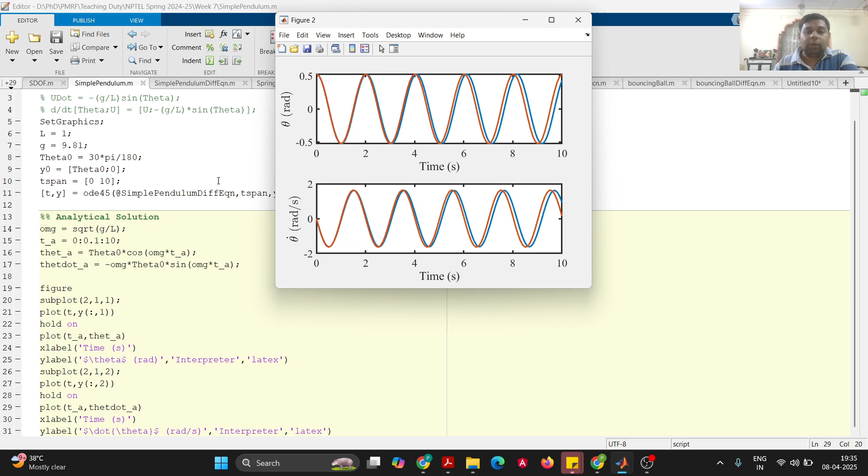And if we now rerun this, we can see that the blue curve is the numerical solution, and the red one is the analytical solution. So what you can observe here is the analytical solution is accurate for up to, let us say, the first

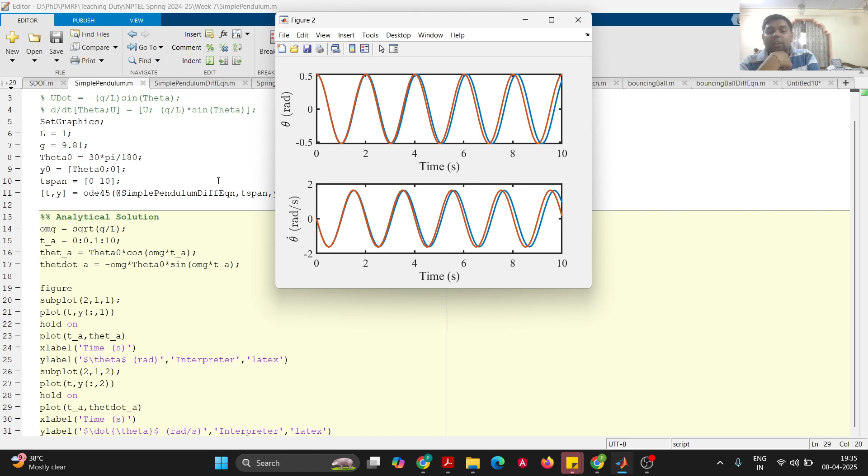3-4 seconds or so, but later on it seems to be deviating, because in the analytical solution the time period for each oscillation is the same, but as per the numerical solution the time period seems to increase as we increase the time. Now if we want to see how the solution behaves over a larger time interval, let us change the time span to 30 seconds and try to rerun.

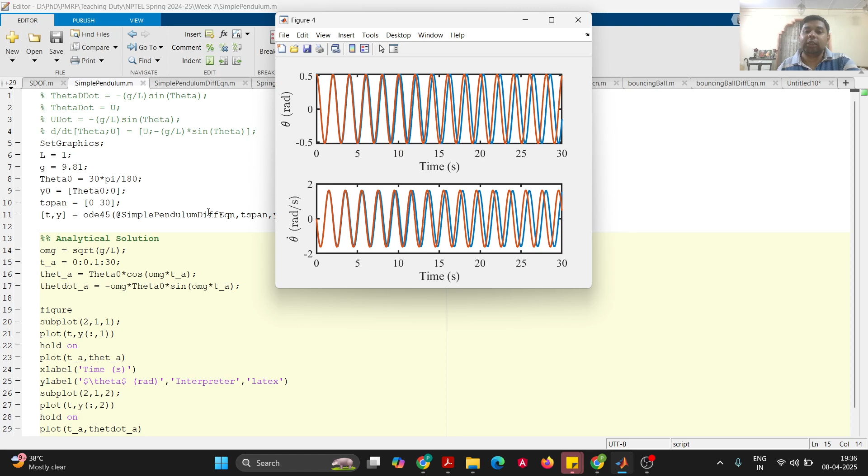So then you can see that the deviation actually increases even further. Yes. Yeah, so you can observe that, right? So this was actually for an initial angle of 30 degrees, which is not that big an angle as such, but still we can see that there is a considerable amount of deviation from the analytical solution. Now let us change the initial angle to 10 degrees.

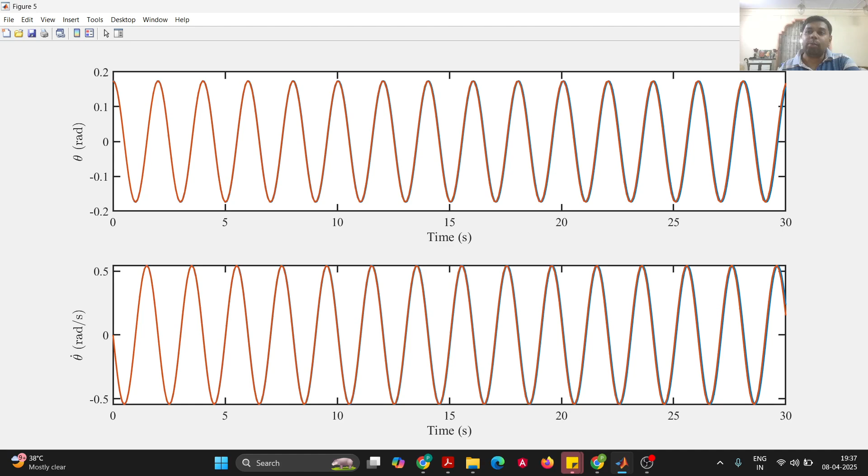So let us change theta naught to 10 degrees and let us try to rerun. So now you can see that the analytical solution is very close, right? So in other problems where you can explore this approach, wherever you know the analytical solution or approximated analytical solution, you can compare it with the numerical solution in this way. So this was a demo example where we consider the simple pendulum as the system.

So was that interesting? Something different for you? Yes, sir. Yeah, so I understood. Yes, yeah.

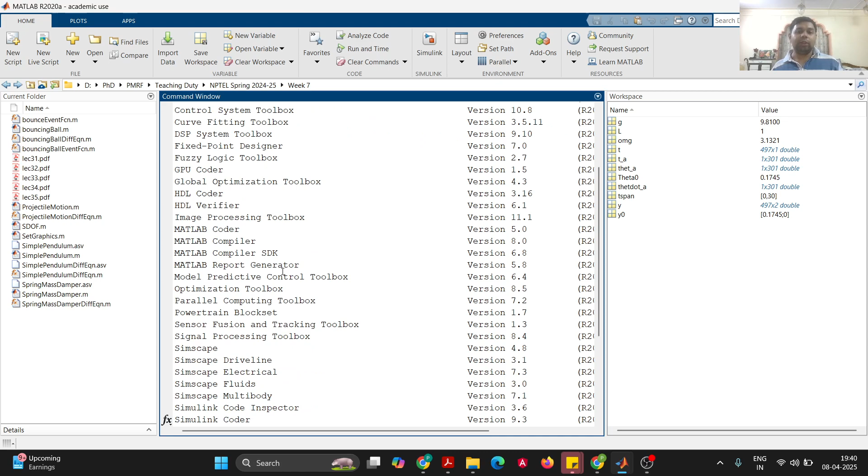toolboxes. So depending on what you have installed, when you install MATLAB, you get the options of installing different toolboxes. So depending on whatever you have selected while installing, you will see the different toolboxes that you have. To check which toolboxes you have already, you can type in the command window ver. That will show you the MATLAB version and also the toolboxes that you have installed, their versions, and all these details.

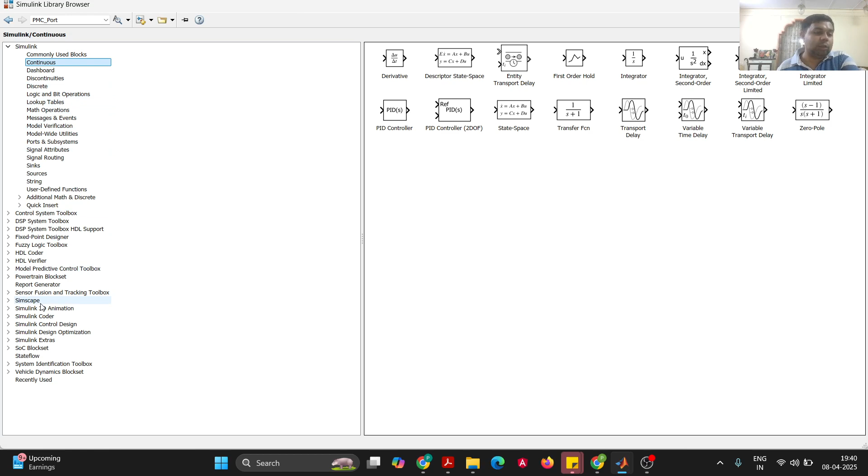So moving on to our basic model. In Simulink you will see different blocks which you can explore for different applications, like the basic Simulink blocks for continuous and discrete systems, etc. And again, the application specific toolboxes over here, you can see from the library browser. Now here we want to create a model of the simple pendulum. So let us first try to solve the linearized differential equation theta double dot is minus g by l theta, or we can also try to solve the non-linear version from here.

So now in Simulink, what we will be doing is integrating. So let me pause this screen sharing for the moment and go to the whiteboard again. So now what we will do here is create a block diagram to represent this differential equation. So let us say we have this signal which is theta double dot. To solve this, we need to integrate it twice, right? Is that correct? Yes, yes.

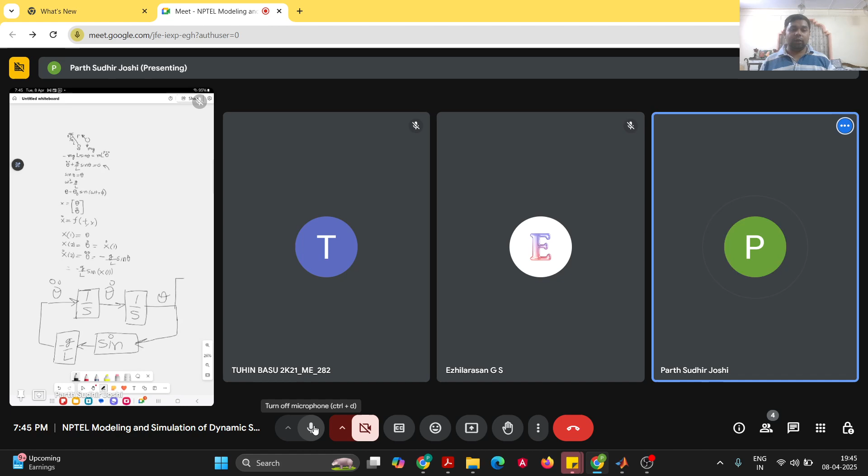So in this case, for this system, we give the initial conditions. So let us say we displace the pendulum by some angle and leave it. So it is in the form of potential energy, and once we leave it, the energy exchange continues from potential to kinetic, etc. So it's free vibrations, right? So then there is no source here. It's in the form of initial conditions that we provide. So that gives us the starting point to solve the differential equation.

So in the integrator, we will provide the initial conditions for each integration. And yeah, so does that answer your question? Yes, I can understand. Right. So let us now move to Simulink.

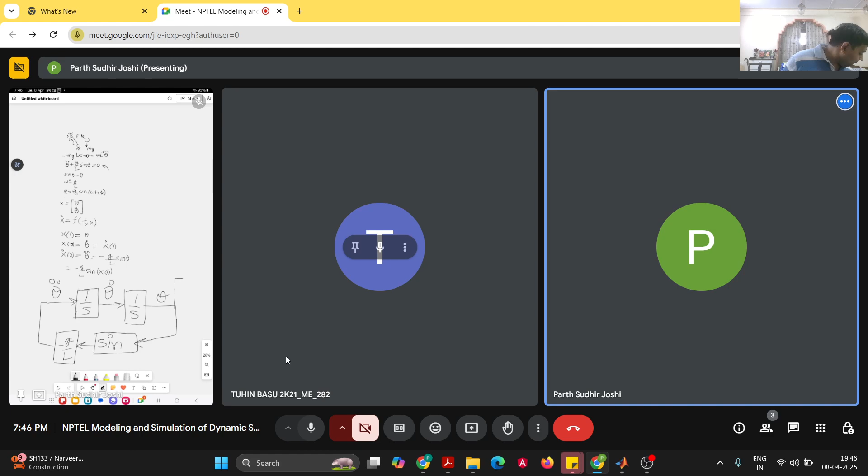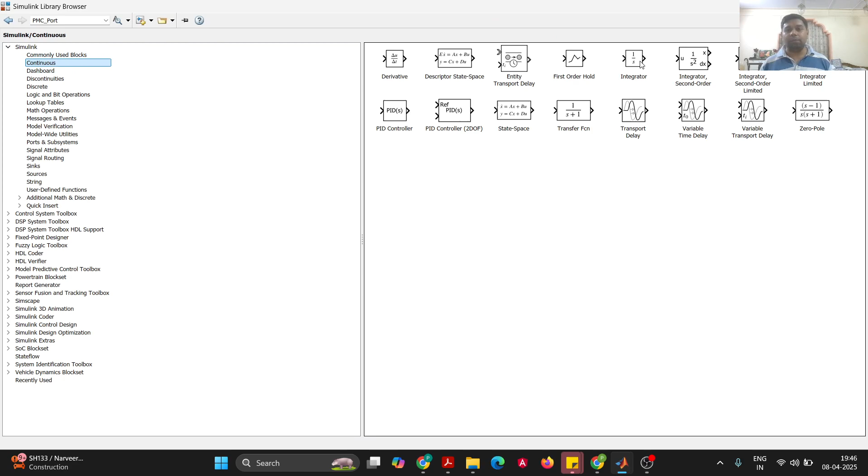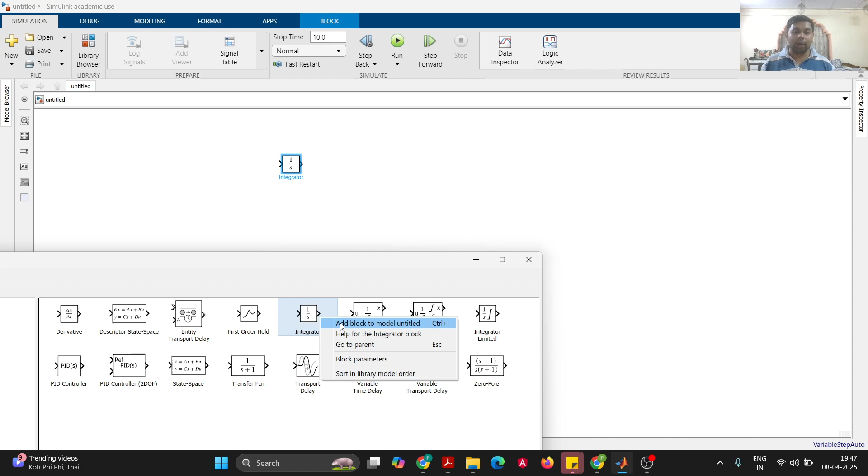So now let us go to our library browser, and put this integrator block into our Simulink model. So to add this block to the Simulink model, there are various ways. Either you can just drag and drop, or you can right click on the Simulink block here, add block to model, whatever the name is. So it's untitled here, and you can use the mouse to drag it and position it anywhere.

Right. So now let us save our model and name it as simple pendulum. Now to connect these two blocks, we can just use the left mouse button to drag a connection and place it into the input.

So let us consider that the input to this integrator is theta double dot, so the output of this is theta dot. So our initial condition of theta dot is 0, and our initial condition for theta is theta naught. So either we can provide the initial condition as some numerical value over here, or if we provide the variable name over here, it can actually pick up that variable from the workspace.

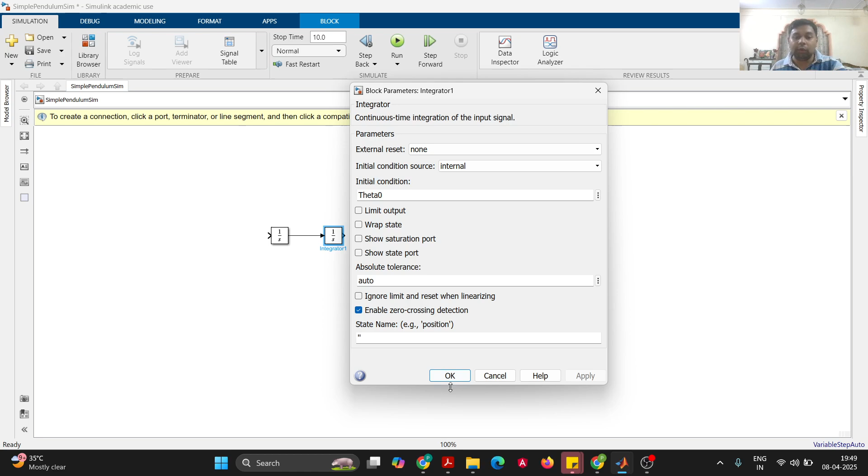So here the initial condition is theta naught. So this is how we can give the initial condition to the integrator. When we double click on it, this contains the parameters. We will be using all the default things, just put the initial condition here. Now the next part is creating sine theta.

So here we will go to the math operations tab in the Simulink library browser, and we will use the common functions kind of block. So here you have a trigonometric function block. You can add this block by right clicking. So this will add the sine. Since we want sine, we can just directly use the sine function. It also has other functions which we can use, so you can explore that.

So now we will basically perform the sine operation on this. So this will give us sine theta, and then we need to multiply it by g by l. To multiply it by g by l, we have two options. We can simply add a gain. So you can use the gain block, and by double clicking on this, you can provide the gain as minus g by l. Since we have already defined these variables in the base workspace, it will be able to pick up these values from there.

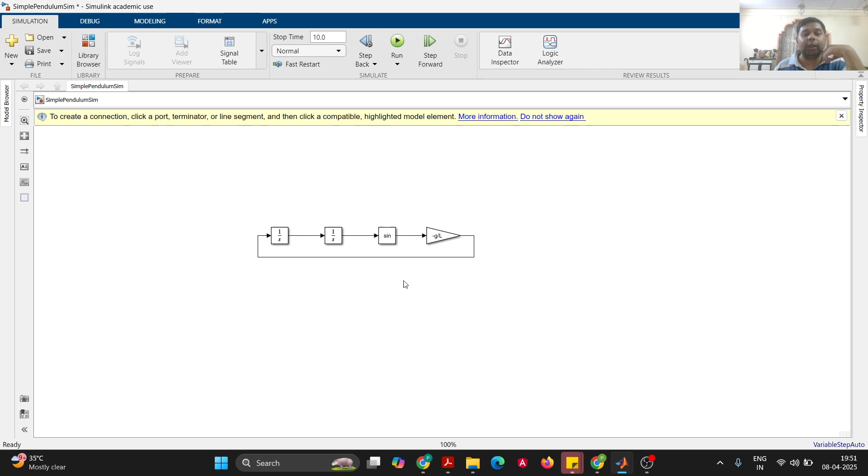So if we do not have these variables defined in the workspace, we need to create a MATLAB script which initializes these parameters, like L, g, theta naught, and all those things. And so that's it. So we have defined what is theta double dot. Now we just need to connect it to this integrator, and we are done.

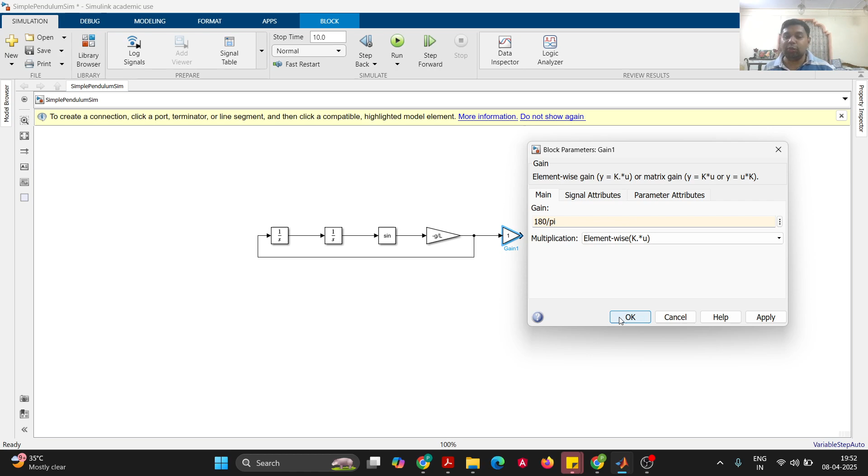So now this will give us the theta value, and it will be in radians. If we want to convert it into degrees for visualizing the output, we can convert this from radians to degrees by multiplying by 180 by pi. In MATLAB you can use the word pi; it has the inbuilt value of pi. So 180 by pi will convert it into degrees, and then we can use a scope.

There is another way in MATLAB, especially the newer versions, to add a block to Simulink. You can just double click anywhere on the screen and type. You will see a magnifying glass appearing, and if you type the name of the block that you want, it will show the list of blocks which match that description. So I want to use, let us say, a scope.

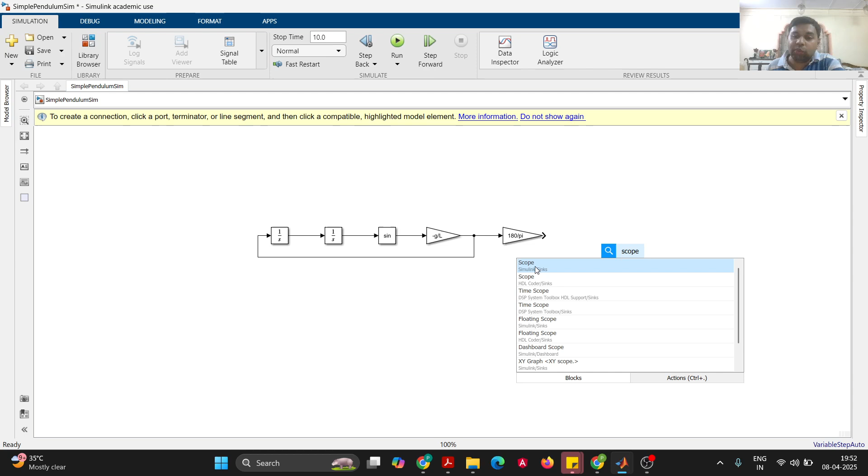So this is the way you can insert a scope directly if you know the name, or otherwise you can navigate the usual way: go to the Sinks tab, and you have different sink options. You can use a scope, and if you want to log this variable to the workspace, you can use this simout block, To Workspace.

So what you need to do is create a branch and provide this as an input to this block. And here you need to provide the variable name by which it will be logged to the workspace. So let us say we give this variable name, and we can save it either as an array, a structure with time, or a time series. For the time being we can save it as a time series.

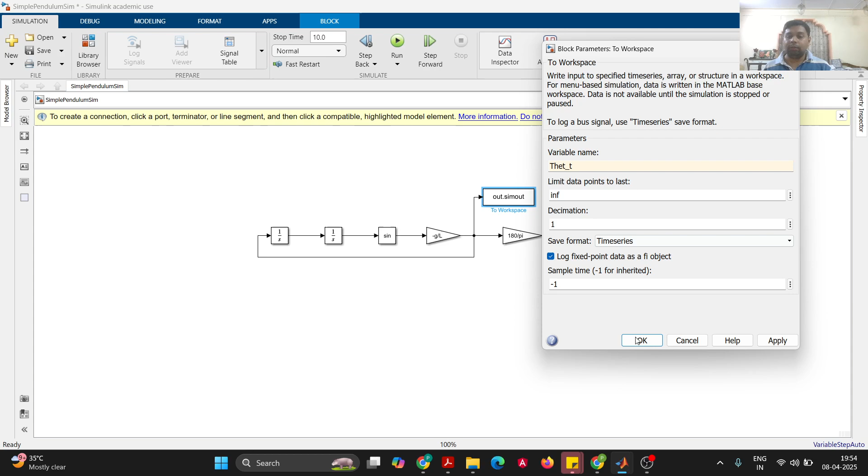Time series means that it will create a structure which contains the time values for the simulation as well as the values of that variable. So it will store the time along with the variable value. So let us say OK. And if we also want to store the value of theta dot, we can add another instance of this block.

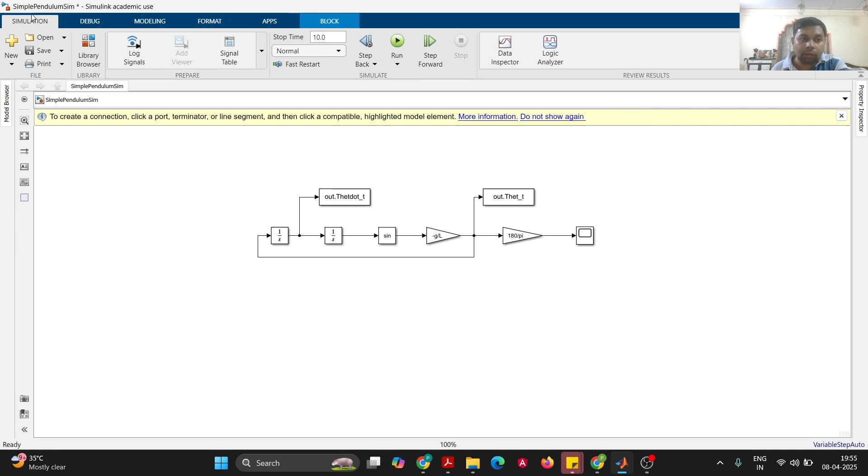After the first integration, we will get theta dot. So here we have to pick up this signal and let us call it theta_dot_t, and also store this as a time series. When we run the Simulink model, it will run over a certain time interval starting from 0, and here we can provide the stop time.

By default it is 10 seconds, and we can simulate it for, let us say, 30 seconds. And if you want to store the simulation time values separately, go to the Sources blocks and you will see a Clock block. You can add this block, and it will output the current simulation time.

And this has the option of decimation. Decimation means that it will store the values every 10 time steps if the decimation is 10. So if our time step is every 1 second, it will start at 0, then after 10 steps it will store at time t equals 10 seconds, and so on. If we pick decimation as 1, it will provide the output at every time step.

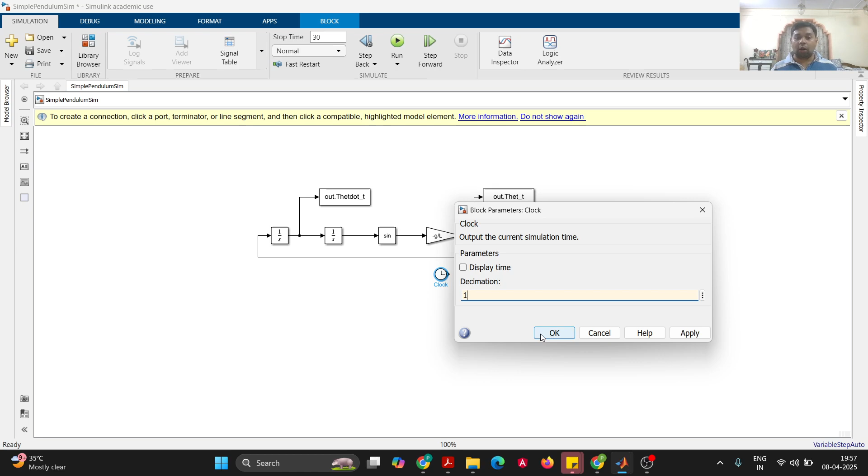And if you want to store this simulation time to another workspace variable, you can go again to Sinks and add a block.

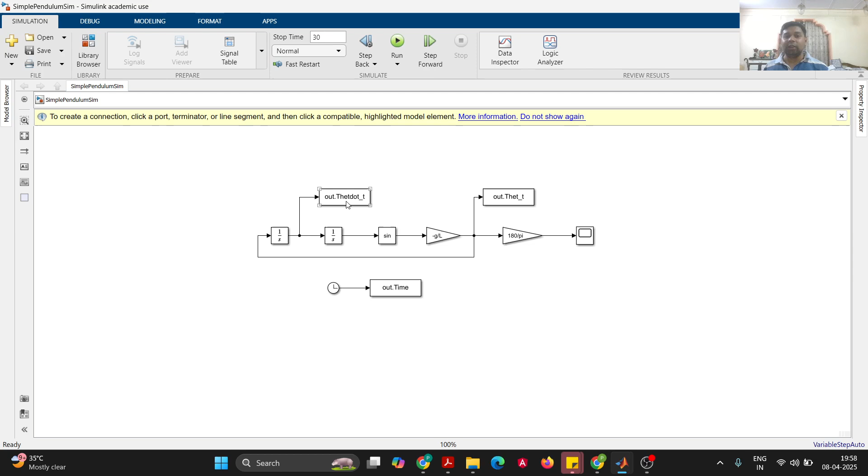And let us name it as time. Now if we are already storing time, then we might as well store it as an array, since time series contains the simulation time. So if we are storing a time variable separately, then we can also convert this into an array form, or we can also stick to time series. So depending on our memory availability and those constraints, you can decide whether you want to store it as a time series or the array format.

So is that clear? Any questions? Yes, right?

Okay. So now we are ready to run the model. To run the model, here you can see something called variable step auto. If you click on that, you will see that the solver name is variable step auto. If you click on this gear symbol, then you will go to the solver settings.

So here you can actually select what type of solver you want. The default one is variable step, and we allow MATLAB to automatically choose the solver; it will analyze what kind of system we have modeled and choose the solver accordingly. If you expand this, you can see the solver details like maximum step size and minimum step size, etc.

To understand the meaning of all these things, you can read the documentation. I will not be doing a deep dive into all these things, but to start with, we use the default options and see what is the output. So let us go to the run button and try to run the model. It will first compile the model, and if there is no error, it will run the model, and we can see the output in the scope.

So we can see here the output in the scope. It actually doesn't seem to be that good. You can see that the output doesn't seem to be realistic. It's a continuous system, and this is jagged, it's not a smooth curve.

So now let us go to our solver settings again. If you hover over this right corner, you will see auto. It has selected the solver named ODE45, and it has selected the maximum step size as 0.6, right? So what this algorithm generally does is that it starts with a coarse solution, and then it tries to refine it depending on what the gradient is.

If the gradient increases, then it will use a smaller time step, so it can adaptively change the time step. Here you can choose adaptive or non-adaptive, based on your requirements. It's a simple problem, so we can probably go with non-adaptive for now. Our earlier max step size was 0.6. So now let us try reducing the max step size and see whether it refines our solution.

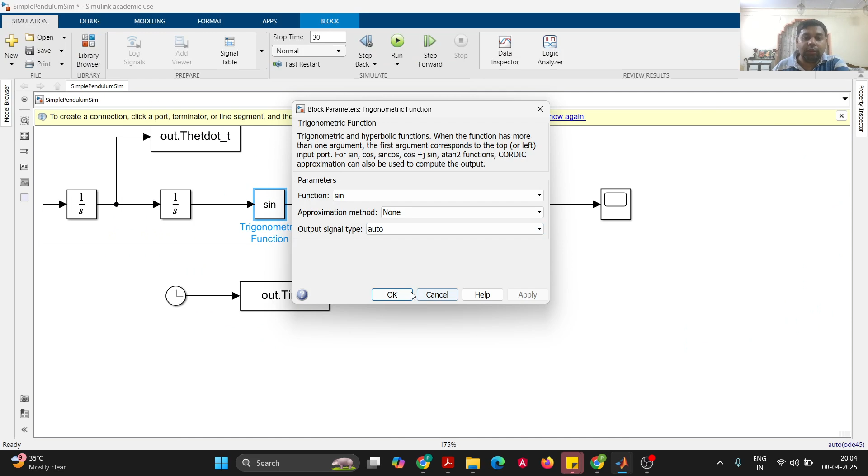So now if we want to go to the documentation for any block, you can double click on the block and say help, and it will open the documentation for that particular block. It will give us the details of this particular block. So here we are considering the angle in radians, and by multiplying it by 180 by pi, we convert it into degrees.

So that's the way we can use Simulink here to solve this problem. So any questions? No, it's clear. Okay.

So similarly, let us move to another problem. We know our usual spring mass damper system, and we are already familiar with the differential equation for that kind of system. So now let us return to our whiteboard.

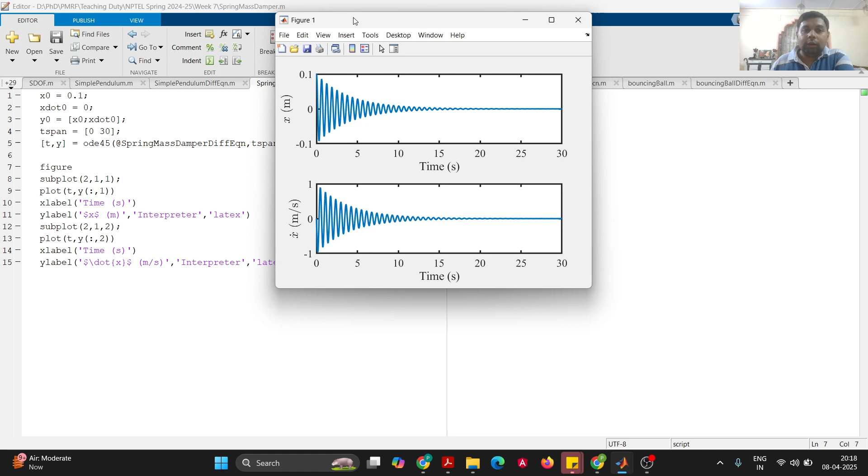So if we change the damping value here, let us say C was selected as 0.5, let us change it to 1 and rerun the script again. If you compare, the oscillations are dying out in a lesser amount of time, right? So the damping has increased, and it will reduce the time required for the oscillations to die out.

Just by looking at the graphs, can we tell whether it's underdamped, critical or over? Yes, the qualitative nature of the graph itself will be very different for overdamped or critically damped. Now, to make out whether it is critically damped or overdamped may not be that easy. For that, you have to look at the specific damping constant value. But for overdamped or critically damped systems, there will be no oscillations at all.

So let us try to increase the damping values. Now we tried 1, now let us try 5. So now you see that there are hardly any oscillations. So now let us reduce the time span; it's much clearer now, or even 5 seconds would be enough probably.

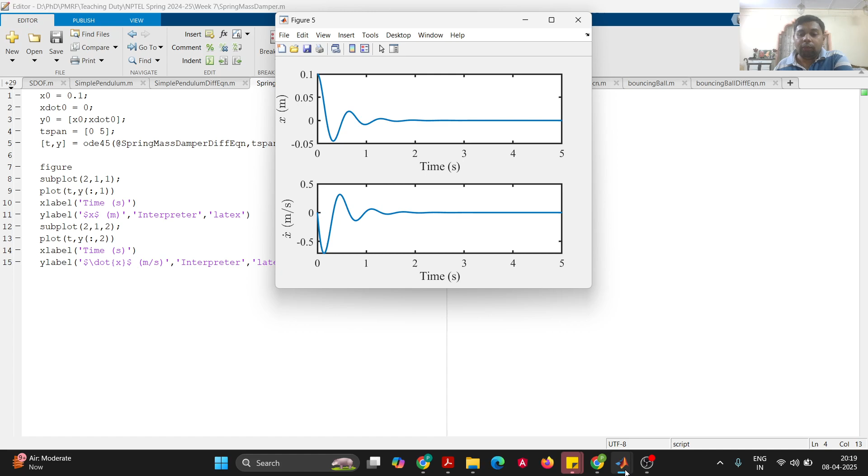So this is for the damping value of 5. If we again increase the damping value to, let us say, 10, and run it again, you can see that the number of cycles it goes through keeps decreasing. There is hardly one cycle of oscillation and it settles down to almost zero.

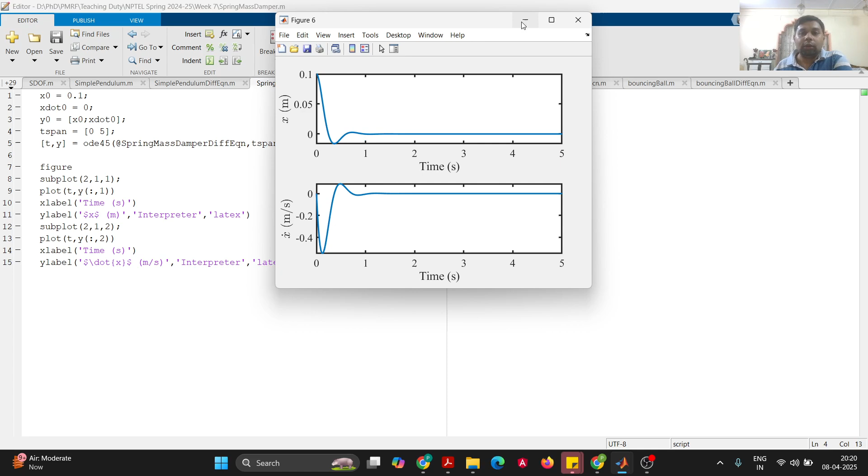Now if we select the value of 20, so if C is equal to 20, that is called critically damped. So why 20 here? Because it is the value where C square is equal to 4 into m into k, which is 4 into 1 into 100, which is 400. When C square is 400, C is equal to 20. So that is the critical damping value. Now let us try to run with that.

So now if you observe, there is actually no oscillation and it just directly goes to 0. If you want to zoom into the plot further, you can pick the time scale and use the magnifying glass tool to look at the plots more closely. But you can see that there is no oscillation, so it is called critically damped.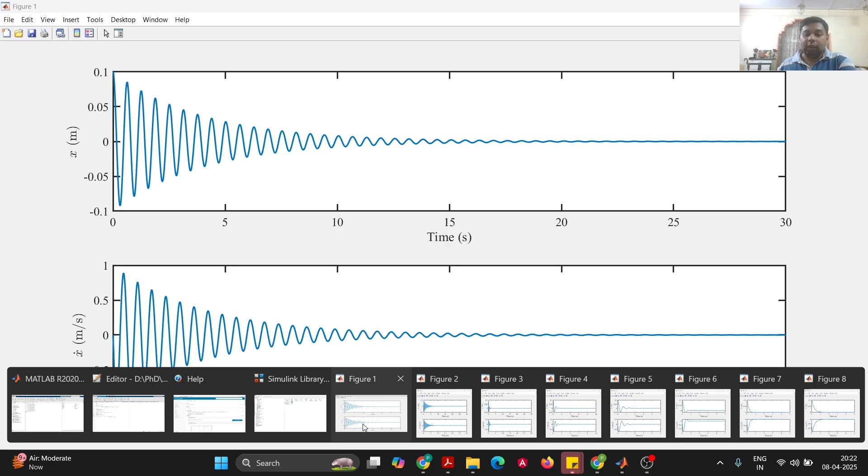And even in this case, even in the underdamped cases, it will eventually settle down to 0, but it will take longer. So as we go on increasing the damping value, it will take less time to settle down to 0.

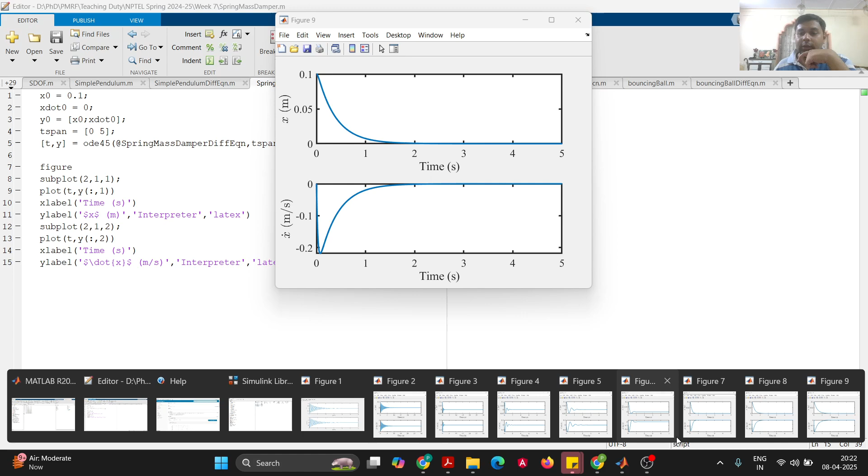Now let us try another example; let us try to increase the damping even further. So you will see that the time required for it to settle down to the steady state values again slightly increased. So you can see that the critical damping case is the one in which it takes the least amount of time to settle down to its steady state value.

So when we design systems where we want to avoid, let us say in case of robotic manipulators, etc., where let us say you want to move the arm in a factory or anything like that. So if you visualize a robot which picks up things and places it somewhere, there we would like to avoid the oscillations as much as possible.

Or even in case of simple examples, you might have come across doors which have a piston cylinder kind of arrangement for automatically closing. So once you open the door and leave it, it will automatically close the door, right? So it has a mechanism along with a piston cylinder arrangement, which is essentially a damper. So there, if you leave the door, it never goes through any oscillations, right? You must have observed.

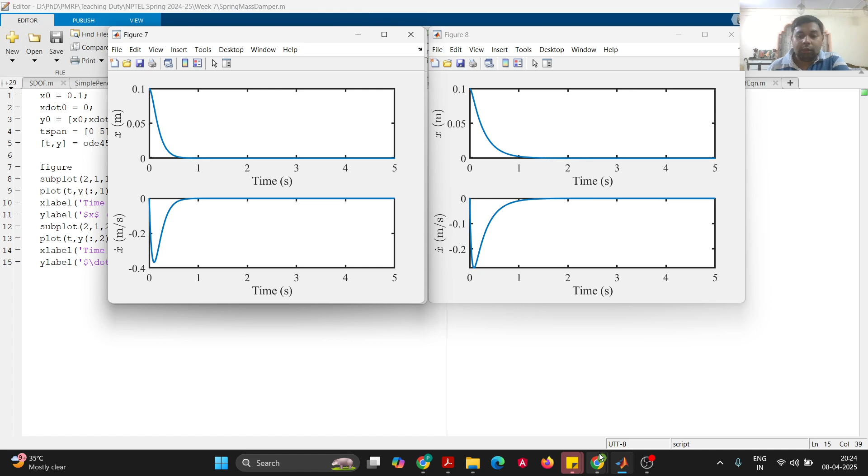So those are examples of critically damped or overdamped kind of systems where the damping is so much that there are no oscillations and it will just gradually go very smoothly to the steady state position of zero. So make sense? Yes. Yeah.

So this is how you can use a MATLAB script to simulate this behavior. Now we can again try to solve this same example using Simulink. So for that, let us create a new model. Sorry.

So now let us again go back to our whiteboard. So we had this differential equation. Now what we want to do is, we have x double dot as our signal. So then our x double dot has to be integrated twice to get the displacement x.

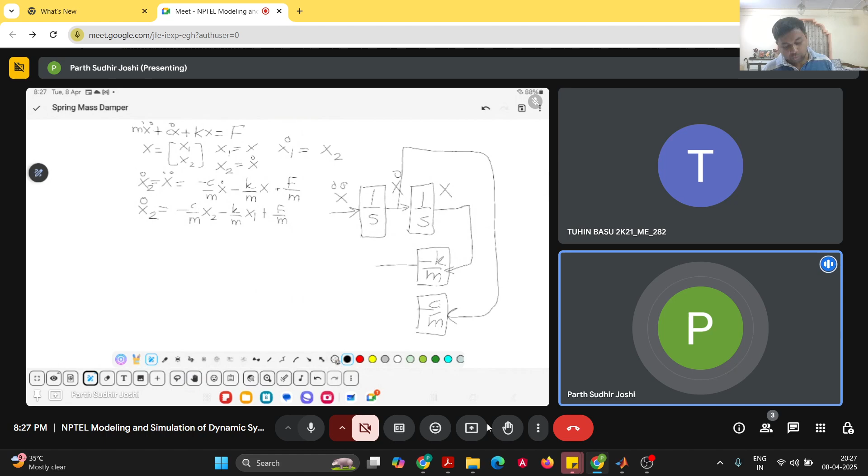So one integration will give x dot, and another integration will give x. Now what we know from our differential equation is that we have to multiply this by minus k by m into x, and then we also need to add minus c by m x dot. So we need to take the signal, minus c by m into x dot.

And if we have any external force, we also need to add that. So that in this case would be a source. So we will basically add these three things together: minus k by m x1, minus c by m x2, and f by m. So this will be added together, and this will give our x double dot. So this will be our block diagram in this case. So does that make sense?

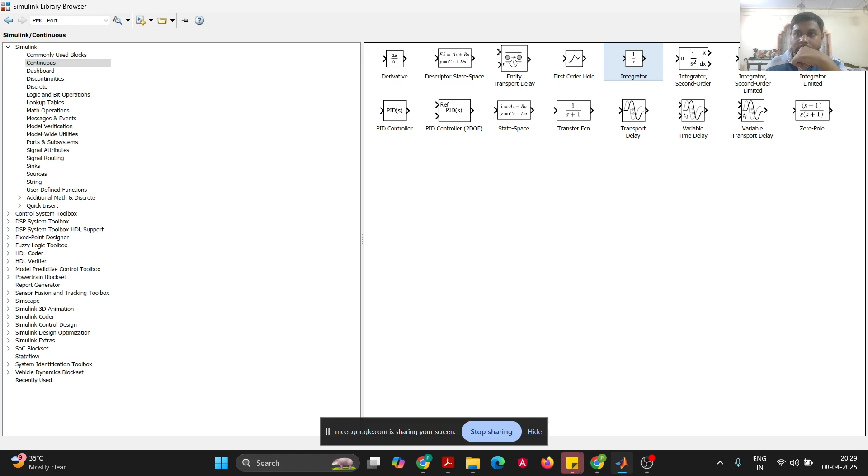Yes. Yeah. So this is how we can create the block diagram in Simulink. So let us try to do that in Simulink now. So these will be our two integrators. Then

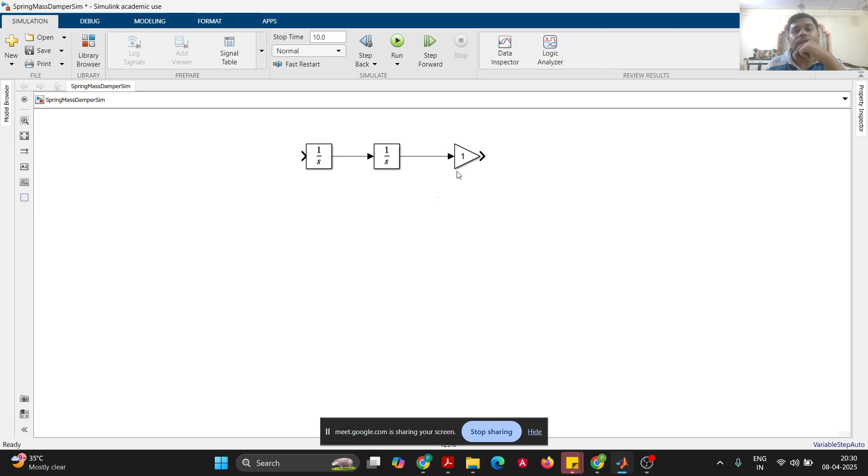So now here I have given the gain value as minus k by m, but now you can see that Simulink highlights it in red, and it shows the error as unrecognized functions or variables. So we have not defined these variables in the workspace here. So we will have to create a MATLAB script to define these variables. So we'll define it later. Let us first finish creating the blocks.

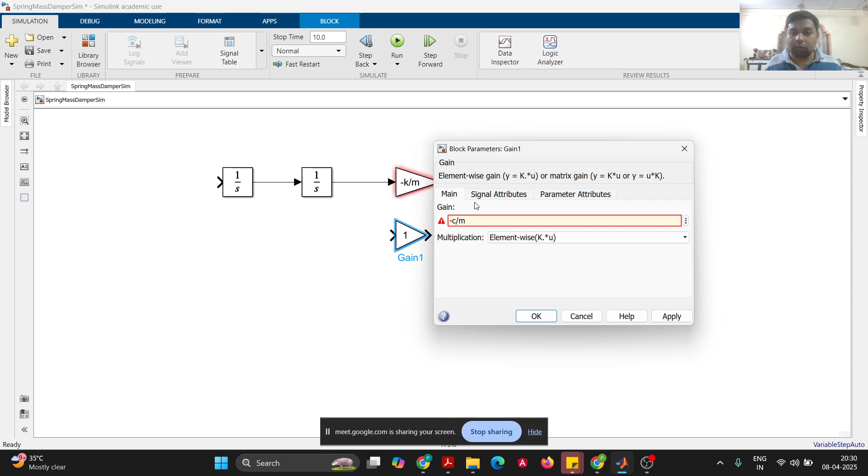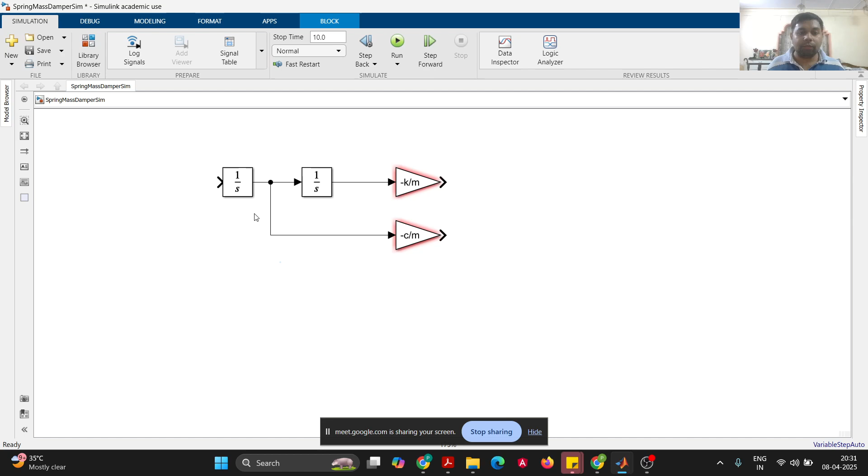So minus c by m will be the gain value for x dot. So let us call x naught the initial condition, and x dot 0 the second initial condition.

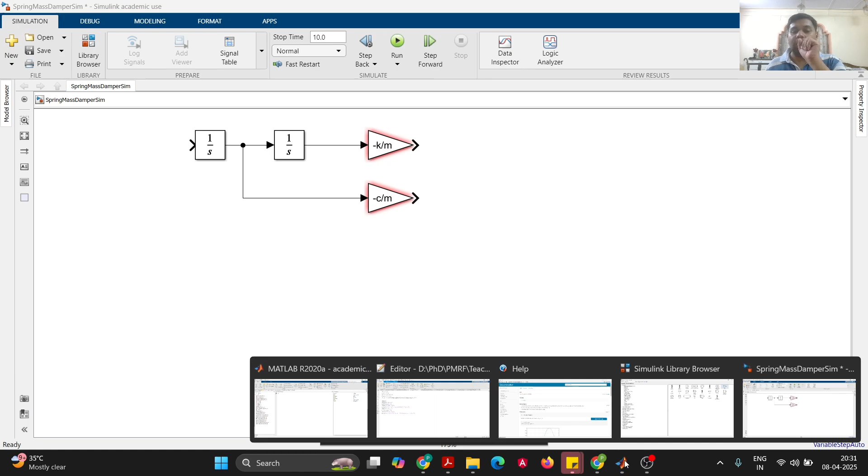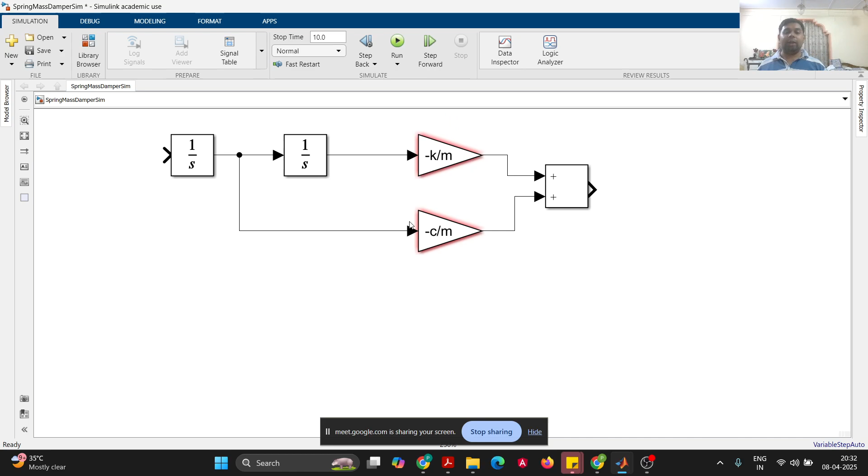Now to add these signals together, what we need to do is go to math operations and select the block named add. So for the time being, let us consider free vibrations, so we'll neglect the external force for now. So that will be minus k by m x and minus c by m x dot. So that will become x double dot. So this we will

go here, and now what we need to do is create all these variables in the workspace. Let us say x naught is 0.1, and x dot 0 is our initial velocity, k is, let us say, 100, c is let us say 0.1, mass is 1, and let us name it as spring mass damper init. And if we run the script, that will create these variables in the workspace.

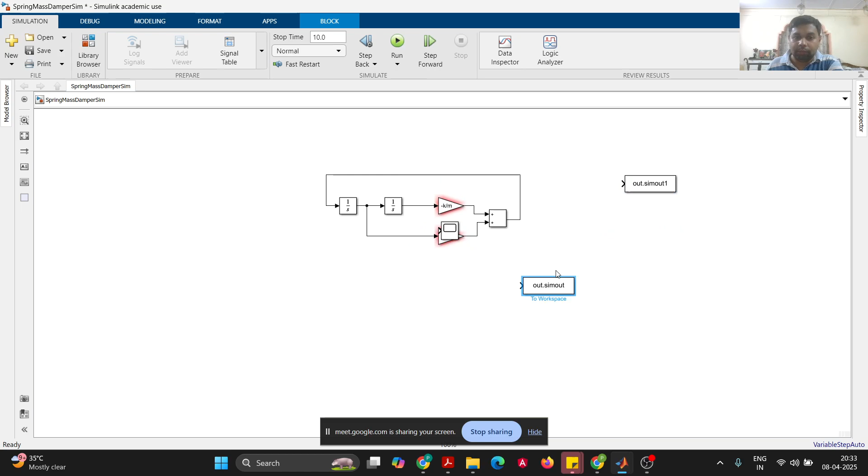So if you run these in the workspace, you will see these variables. Now, as we had discussed earlier, let us create the sink blocks. So let us say scope, and let us store the velocity and displacement outputs. So this will be velocity. Let us call it x dot. Let us store it in the form of array, and here we will have the value of displacement x.

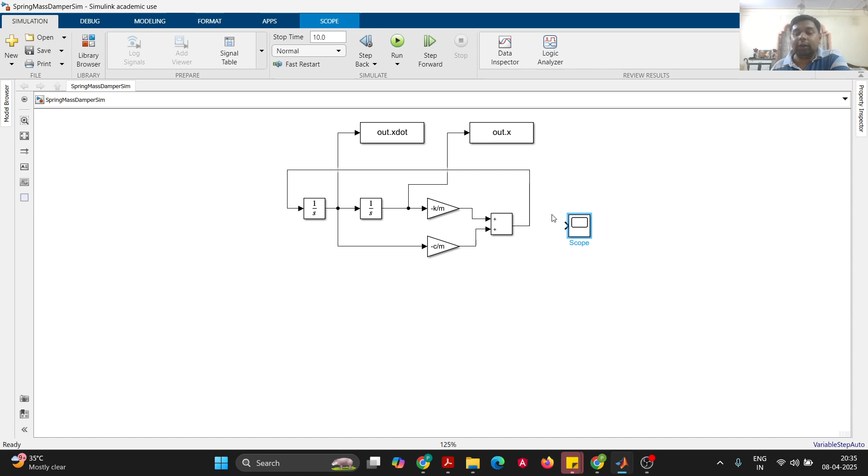Now here we can see that this still shows the red highlight. So for that, you can go to the modeling tab and say update model. It will compile the model and show whether there is any error. Here it found these values of k by m and c by m in the workspace, so now it has removed that red highlight. So when you are building the model step by step, you can use this feature to debug it.

So now if you want to visualize both displacement and velocity, you can go into the scope and select the number of input ports as 2. Then it has created another input port. So the second input will be velocity. So that completes our Simulink model, and now we can try to run this model, say for 30 seconds.

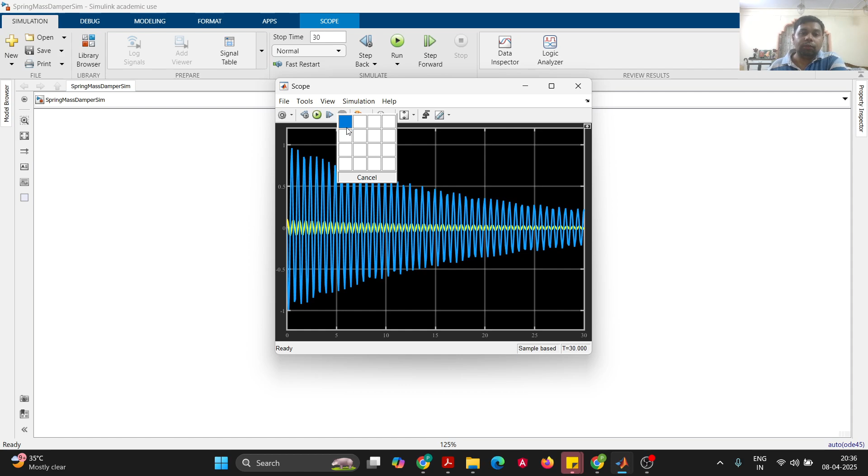Now with the default solver and step size options, let us just try to run the model first and see what its output is. So here this shows the two figures in a superimposed form. So to visualize it into different subplots, you can auto fit the contents here. Now you can see that the general output seems to be okay, but it's still not a smooth curve. So then we might want to look at the step size.

It has picked up the solver ODE45 automatically, and the maximum step size has been picked up as 0.6. So let us try to change that to 0.01. Now you can see that the output is much more smooth. So this was our output when the damping value was 0.1. Now let us change that damping value to 1 and see how the output of the Simulink model

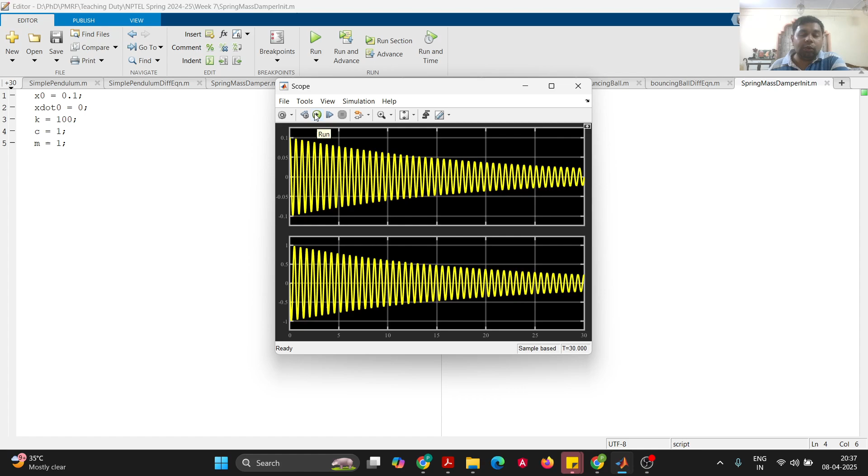changes. If we have not made any changes to the model, we can also run the model from the scope. The scope also has a run button, so we can just run over here, and you can see immediately that the output has changed. Now the oscillations take less time to die out because our damping value has increased. Now let us increase it to 10, and let us change the stop time to 10 seconds only. So we can see that the damping has increased.

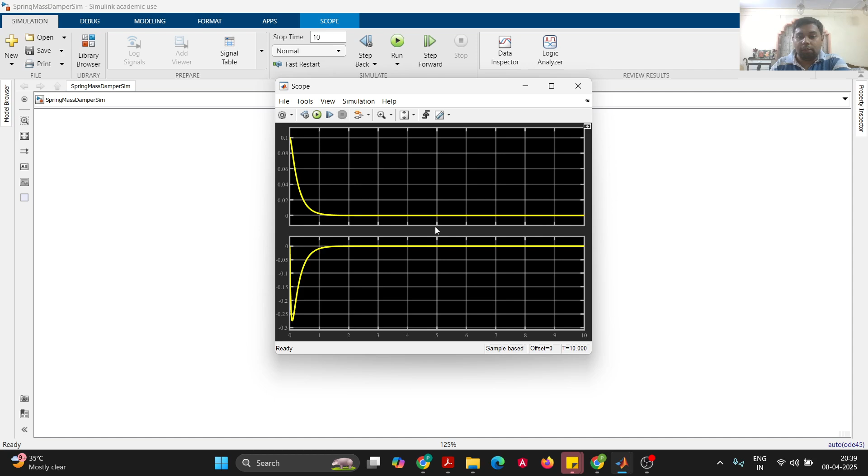Now if you go to 20 and again try to rerun the model, you will see the critically damped output where there is no oscillation. It's the same thing that we saw just now with the MATLAB script; the Simulink model also provides the same results to us. Now with the damping value of 30, you see the overdamped behavior. So this is how you can use the Simulink as well as MATLAB script approaches.

You can also try to change the solver if you want, let us say a fixed step solver, and let us say leave the solver selection and step size as auto, and then try to rerun this model.

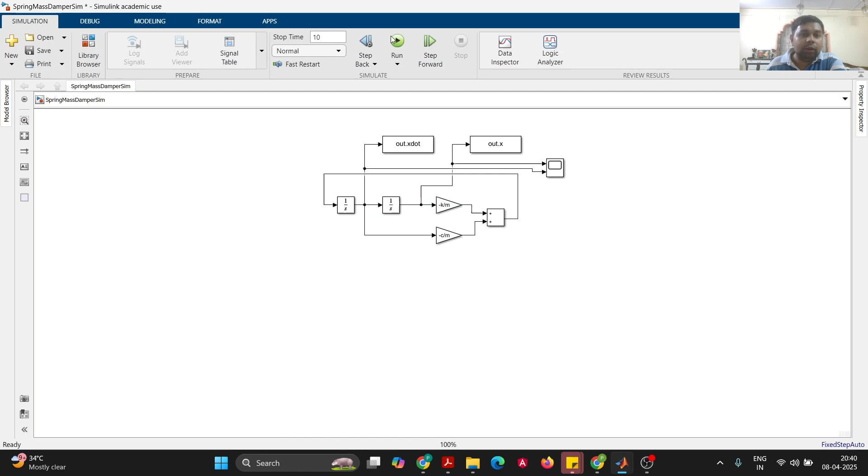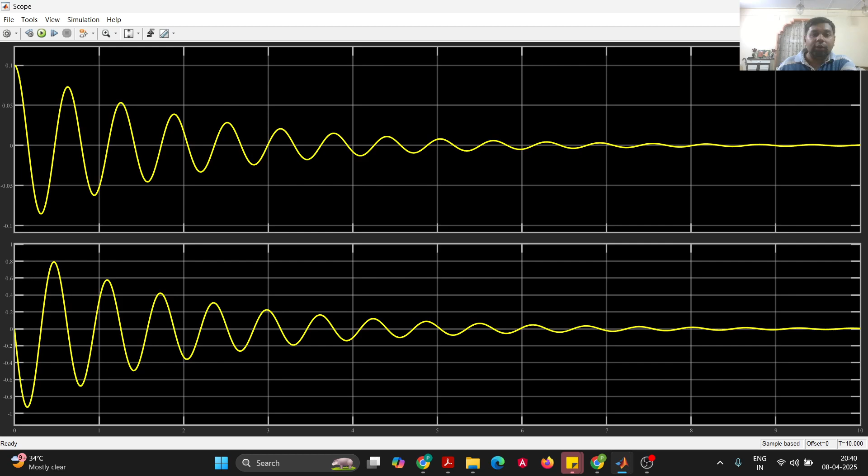So let us start with the damping value of 1 and let us change the fixed step size to, let us say, 0.01. Okay, and then rerun this model. We can see that we are getting the desired, expected behavior, like the overdamped or underdamped behavior, what we are expecting.

Now if we change the damping value to 10 and try to rerun, then again it shows the expected behavior. So we basically need to refine the step size. If we go on refining the step size, let us say instead of 0.01 we select 0.005 or whatever, then we will reach a point where the behavior of the solution does not change much.

As we go on decreasing the time step, it will refine our results hopefully. But if we go on decreasing the time step further and the nature of the solution does not change, then that is called convergence, right? So we converge to our expected solution, and further refining the time step will just increase the computation time.

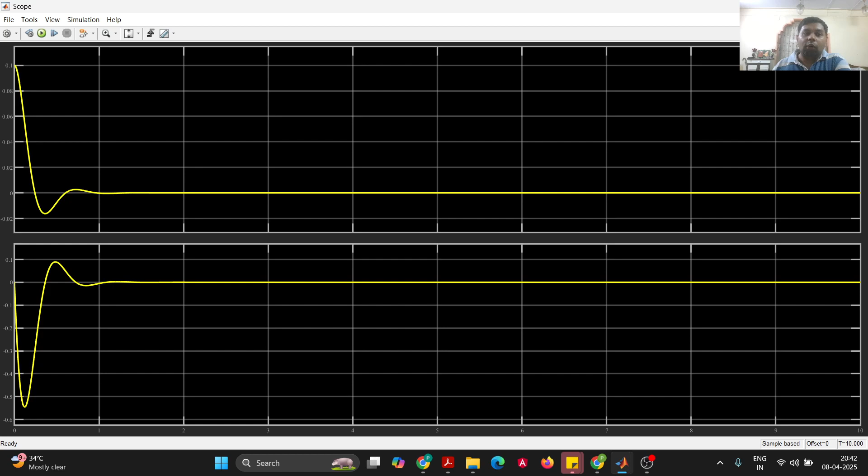So then we need to select it depending on the computation and the memory. As we go on refining the time step, it will also increase our memory requirement because we have to store a large number of values. So we have to select the time step wisely based on all these aspects, like what is our memory constraint, and what is good enough.

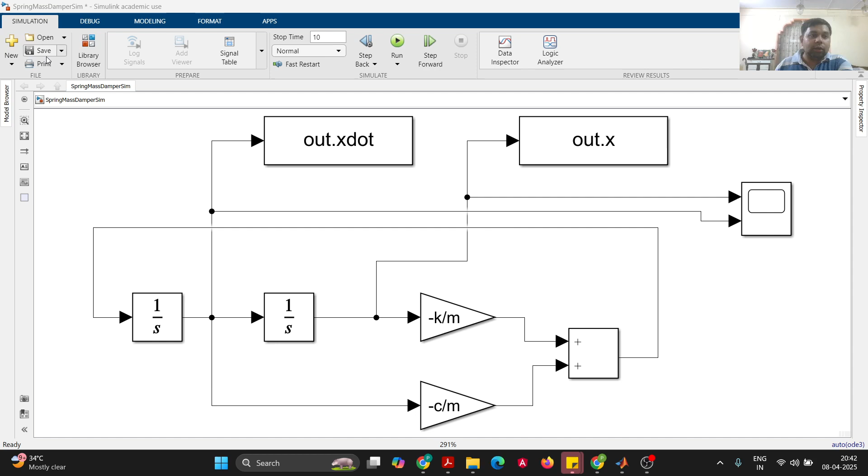So I hope this gives you some good idea of using MATLAB Simulink as well as the script, right? Makes sense? Yes, sir. Yeah.

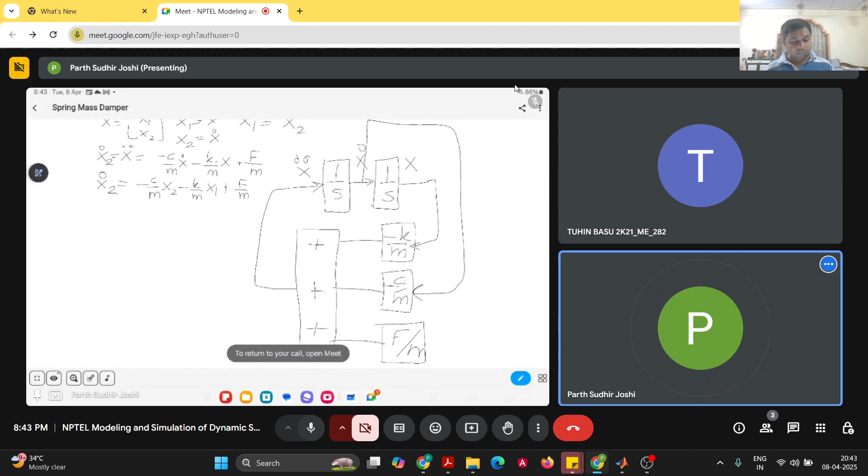Now let us look at a different kind of example, which you might have come across in your basic mechanics in school days, what we generally call projectile motion. It means when we throw a projectile or some object into air, let us say we throw a ball from the ground with some angle with respect to the horizontal. Based on simple mechanics, kinematics, we already know the simple kinematic equations for that kind of problem.

Excuse me. So we already know from kinematics how to solve those equations, but now we want to simulate the behavior of that simple projectile thrown into air in a MATLAB Simulink based environment. Let us say we have a coordinate system x, y, and we are standing at the origin and throw a ball with the initial velocity v naught, whose inclination is at theta with respect to the horizontal.

Then, if we are throwing it into air, what will be the force acting on that mass? Let us say it is just a ball of mass m. Neglecting the air resistance, its weight will be the only force acting on it, right? So the acceleration in y direction, y double dot, is equal to minus g, and the acceleration in x direction is 0, right?

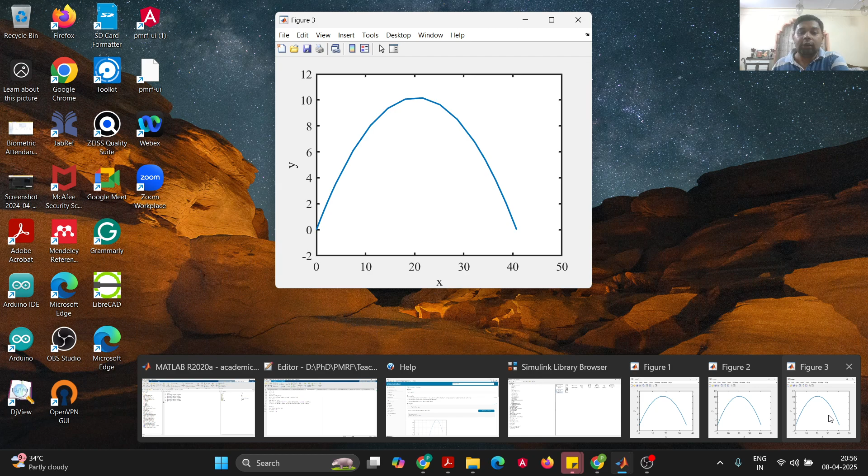So now if we change the angle, then you will see the time of integration has changed, and the initial angle of launching the projectile has also changed. So this is how you can use this numerical solution method to solve the projectile motion kind of problem.

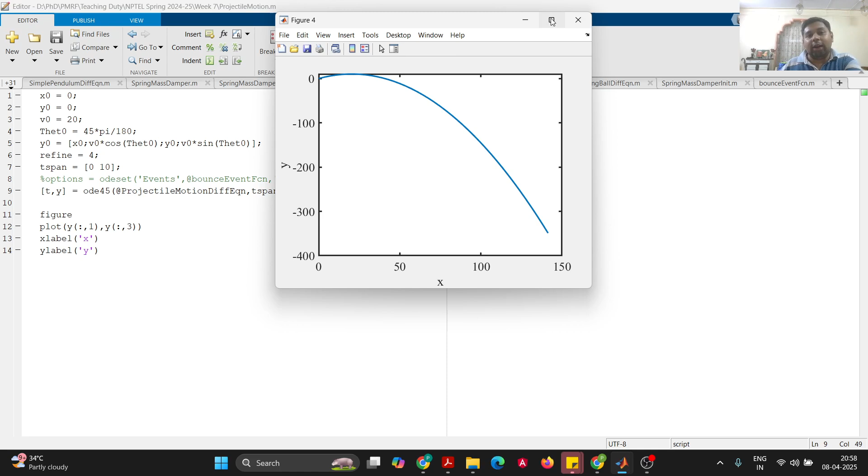So either the ball will just bounce off the ground and do more such bounces, or it will just go and stick into the ground, fall onto the ground, and that's it. It will not get embedded further into the ground, right? So we need to cut off this integration beyond the point where y values are negative. So that's how, in certain problems, you can use this feature of event detection.

So let us say if we want to actually analyze the bouncing ball kind of motion, then we can extend this further. Here we are stopping the integration when y reaches 0. You can extend the same problem further, and so here I have created another example to solve this bouncing ball problem.

So what we do here is basically detect this event in the same way as we saw in the projectile motion. Let us say we are looking at the problem where we just throw the ball vertically upwards, not in the form of a projectile, and we want to see the height it reaches, and then it will come back, hit the ground and bounce back.

So with each bouncing event, we know from the general mechanics of impact that the collision can be either elastic or inelastic. In an elastic collision there will be no energy loss, so it will bounce back with the same velocity. The velocity direction will change and the magnitude will remain the same for an elastic collision.

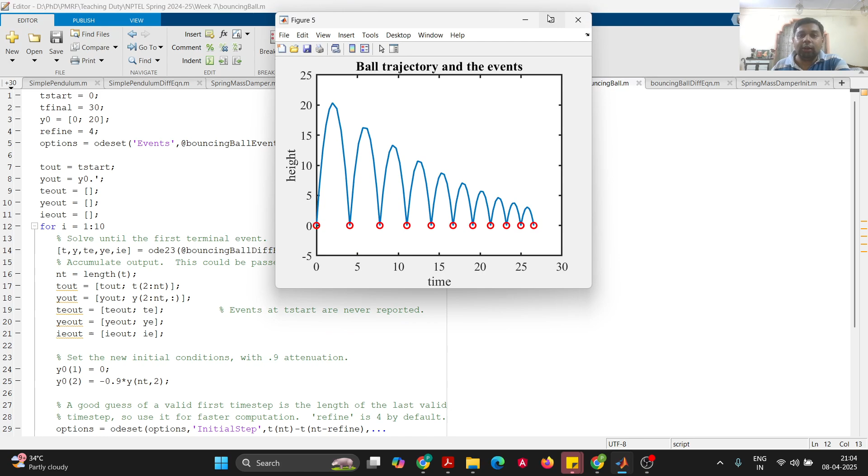So let us try to run the script. So we can see here that the ball starts from a height of 0, reaches a maximum height, bounces back, but reaches a lesser maximum height, and so on. So you can see that the height progressively goes on decreasing with every bounce. Right.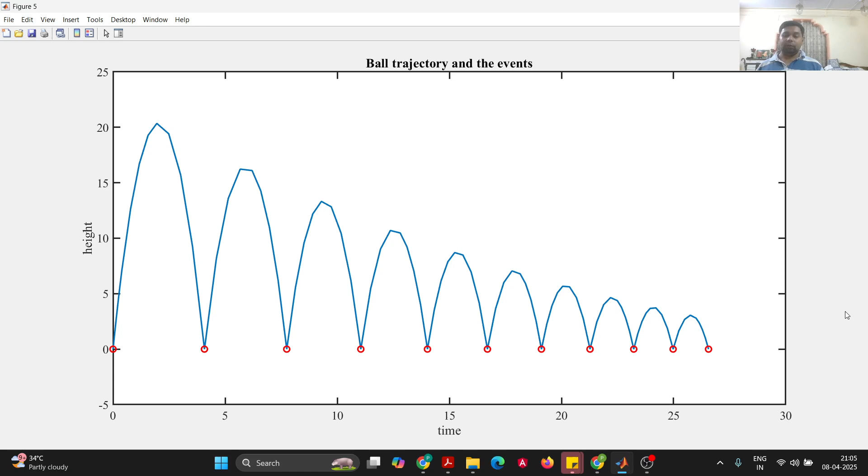So this is how you can use this feature of event detection in your problems. Even in case of a pendulum, let us say it is hitting a boundary wall or something, you can also create this kind of an event function to detect this. So I have tried to show you some basic examples of simple mechanics problems in which you can use MATLAB and Simulink, and I hope this demonstration was helpful.